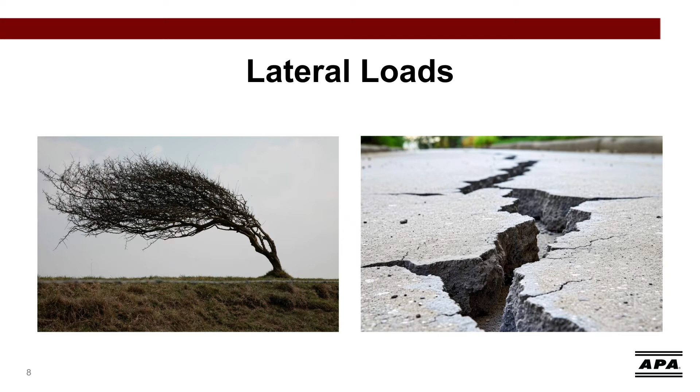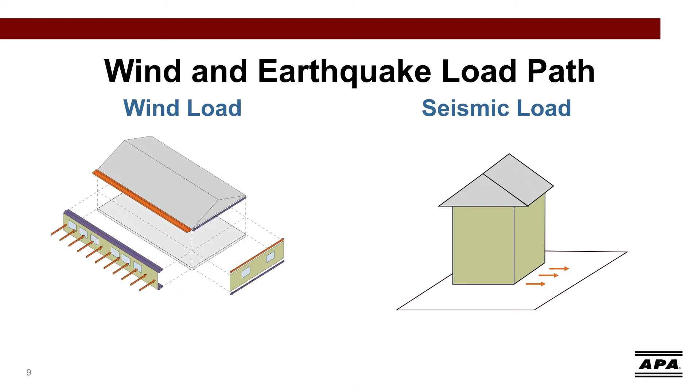To see the lateral load path through the house, we've broken it down into 5 steps. On the left, you can see wind loading, and on the right, you can see earthquake loading. Let's walk through the steps in the load path. They're similar in both cases, which is why the forces get grouped together.

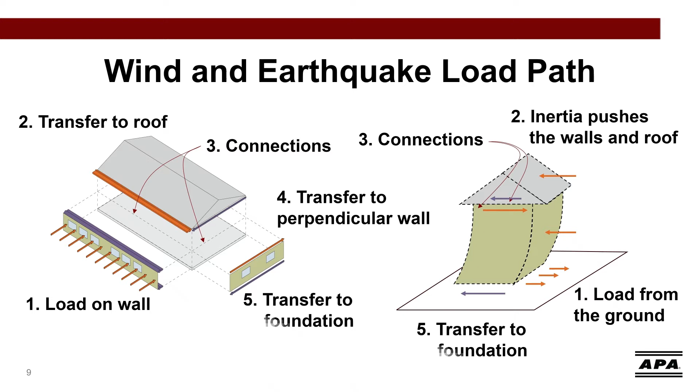The load will affect one wall and then be transferred through the connections into the roof or a floor, and then it will be transferred to the perpendicular wall, again through the connections, and finally the perpendicular wall will take the load down to the foundation.

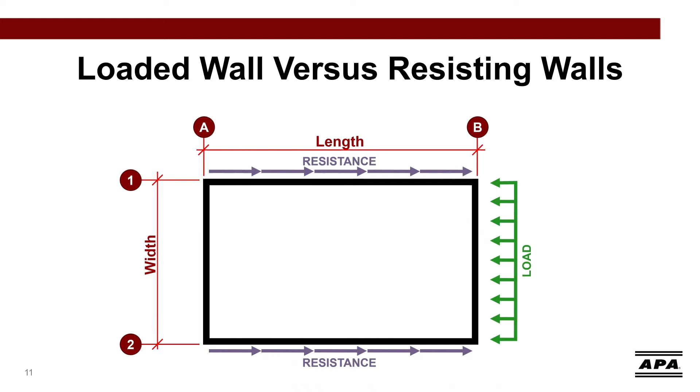If the length and width are to scale, resisting the load in this direction will generally be easier than the last slide because the load wall is shorter, meaning the overall forces are smaller, and the resistance walls are longer, which means there is more space for wall bracing while maintaining the same amount of openings.

The APA and IRC Simplified wall bracing methods are great ways to ensure a complete lateral load path with minimal confusion.

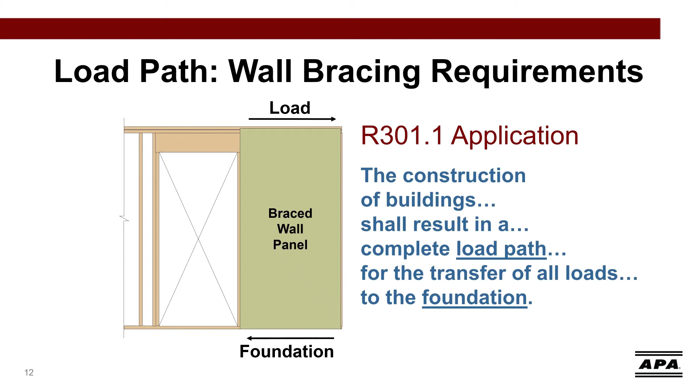Within braced wall panels, there are a lot of different options in the code. We will turn to the APA laboratory to compare the strength of 4 of these methods. These concepts will be key to later parts in this presentation.

So here are the results from full wall bracing tests published in APA Full-Scale 3D Wall Bracing Tests, Form T2007-73. If you would like to go read the full report, it's available for download on our website. The base case tested was intermittent wood structural panels.

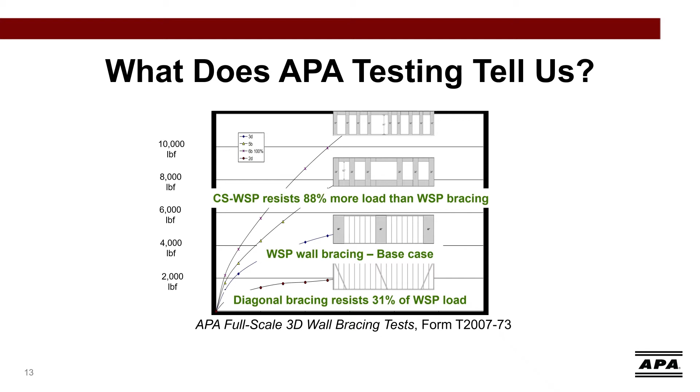The lowest strength found was from diagonal wall bracing, which produced only 31% of the load resistance of the intermittent wood structural panels. Our third tested assembly was continuously sheathed wood structural panels, which provided 88% more load resistance than the base case. Finally, our fourth case is a continuously sheathed portal frame assembly, which resists 174% more load than intermittent wood structural panels.

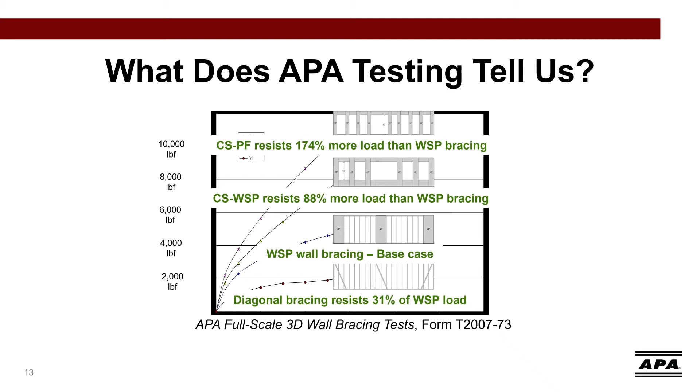These results showed APA the benefits of continuously sheathed wood structural panels and portal frame assemblies. We need to talk about what can go wrong. Why do we care about wall bracing and completing the load path? I'm going to show some quick examples of 3 lateral load failures: racking, base shear, and overturning.

If we go back to our wind and seismic load analogies from a few slides ago, you can imagine leaving a hardware store and experiencing a big gust of wind, or being on public transportation with starting and stopping motion, but now your feet are stuck in concrete, so you tilt backwards.

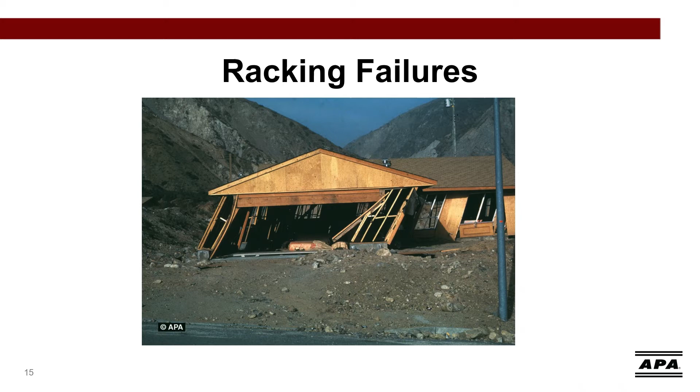This is what happens when we don't have enough anchors to resist lateral force and properly connect the wall to the foundation. Today we will talk primarily about wall bracing designs, but the anchors to the foundation are equally important to complete the load path.

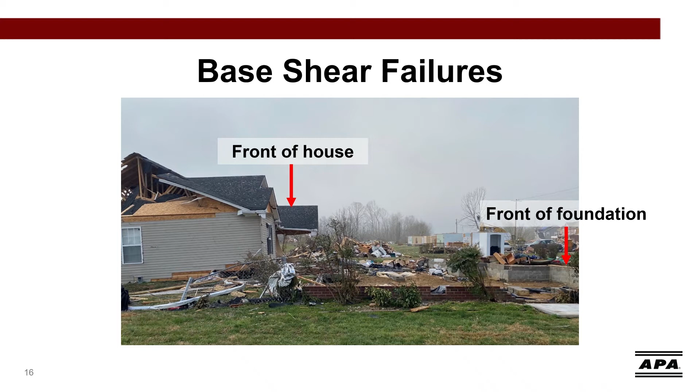To go back to our real-life analogies, this would be you trying to resist the wind or seismic load, but now you're on roller skates. So when that wind pushes against you or the train stops, you don't have any way to stop yourself from rolling away from your initial location.

Essentially, what would happen is the house stays together because of the wall bracing, but doesn't have enough weight or hold downs to stop it from tipping over.

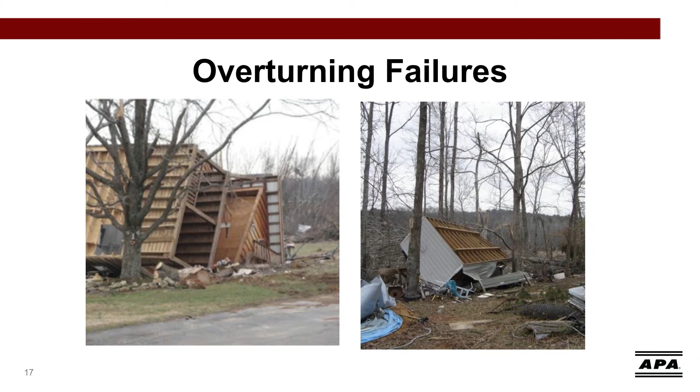Going back to our analogies one more time, this scenario has you holding that sheet of wood structural panel in the wind, but you are absolutely rigid. You cannot bend in any way. So if the wind is strong enough, you will tip over.

Now that we understand the importance of lateral load systems, let's begin with the origins of the two simplified wall bracing methods we are discussing today. In the case of the IRC Simplified method, it's pretty straightforward. There's a section in the International Residential Code, which I will refer to as the IRC, that describes this method. It is section 602.12, the final section of the wall bracing area of the code.

To find the system report that describes the APA Simplified method, follow these simple steps. First, go to the APA website, apawood.org, and click on Publications under the Resource Library tab. Then type in SR102 or Simplified Wall Bracing in the search bar and hit Enter. This is the screen that will pop up.

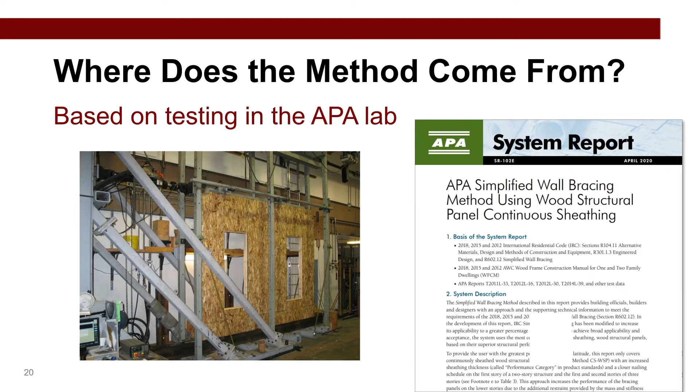Now that we are familiar with the basis of both the IRC and the APA Simplified methods and can find them, we're going to describe their requirements. Because they are simplified methods, they have specific requirements in order to use each method. We'll start with the requirements for both the IRC Simplified and the APA Simplified method.

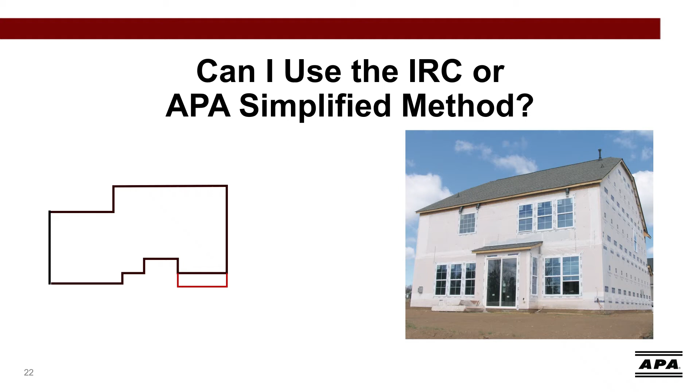Both methods require the structure to be less than 3 stories. They need an eave to ridge height that's less than 15 feet, and the floors can only cantilever 24 inches or less. The final requirement relates to wall height. For the IRC Simplified method, the maximum wall height is 10 feet. There is one minor change for the APA Simplified method requirements: the wall height can be up to 12 feet, so that's a bit of a difference between the two methods.

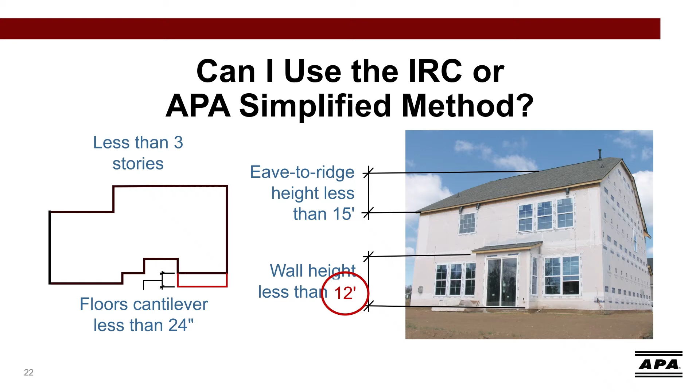We have a few more requirements to use either the APA or the IRC Simplified method. The structure has to fall within seismic design category A, B, or C for a single-family home, or category A or B for a townhouse. The structure must also have an ultimate wind design speed of less than or equal to 130 miles per hour and be in wind exposure category B or C.

In this case, I chose an example of somewhere in Iowa. We would look at these two maps found in the IRC, and we would see that this structure falls under IRC Seismic Design Category A and an ultimate wind design speed of 105 miles per hour, close to the 110 mile per hour border. But either way, it falls within the requirements.

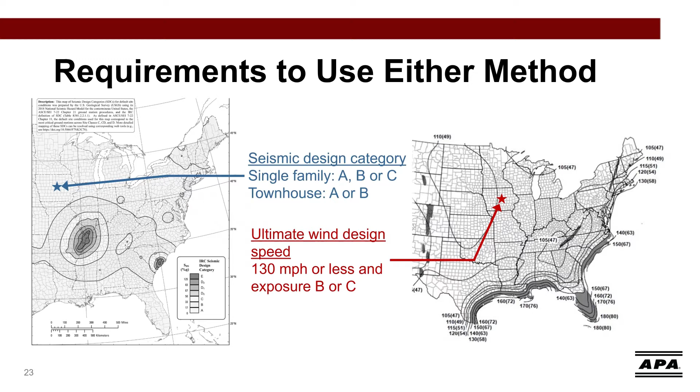Our final requirement for using either the APA Simplified or the IRC Simplified method is that there can be no cripple walls in a 3-story building. You'll see later in this presentation that there is an adjustment factor for cripple walls in a 1- or 2-story building, but no cripple walls are allowed in 3-story buildings.

Additionally, permanent wood foundations are not allowed in either the IRC or APA Simplified method.

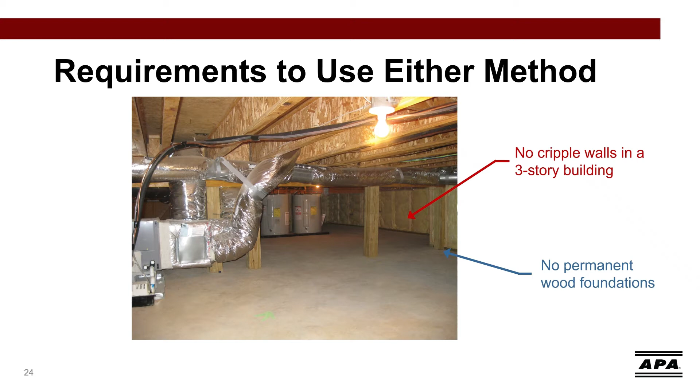We will now differentiate the IRC Simplified method. It has some additional specific requirements to show you. The first is that the exterior walls must have 1/2 inch of gypsum board on the interior face. There is an exception to this requirement for portal frames, which we will discuss later in this presentation.

The second requirement is that all horizontal panel joints in the wood structural panels should be blocked. Those are the two requirements specific to the IRC Simplified method.

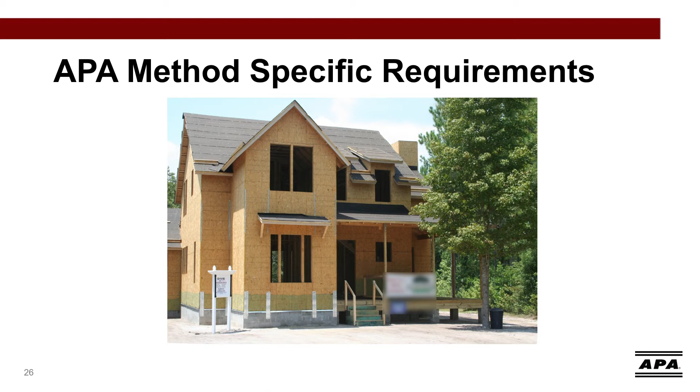Now there are two APA Simplified method specific requirements we're going to talk about. The first is that the sheathing on the lower stories, meaning the first story of a two-story home and the first and second story of a three-story home, have above the code minimum panel edge nailing. The panel edge nailing is 8D common nails at 4 inches on center. For reference, the code minimum edge nailing is 6D or 8D common nails at 6 inches on center. The intermediate fastening does not change from the code minimum nailing of 12 inches on center. In the APA Simplified method, the upper story also has the code minimum nailing requirement.

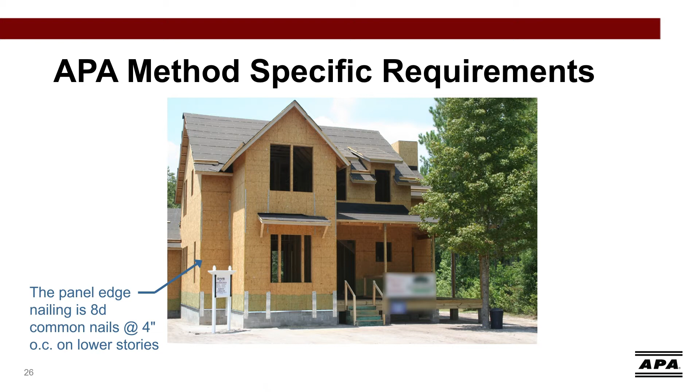The second requirement is that the home must be continuously sheathed with 7/16 inch performance category wood structural panels. There is no option for intermittent wall bracing in this method. The structure must be continuously sheathed so that it can take advantage of the extra strength provided by having continuously sheathed wall assemblies.

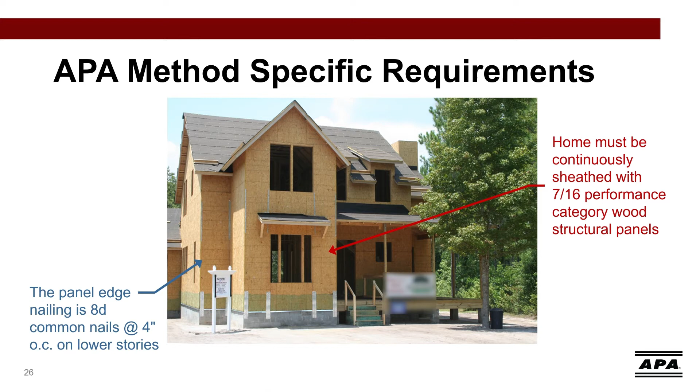Now that we know the requirements and have checked our house to make sure we can use this method, we will transition into the steps of this method. There are 3 steps, so it should be easy to remember and execute. Step 1: circumscribe a rectangle around the structure. Now that we see what that rectangle would look like, we verify it fits within the requirements. Both the long and short side must be less than 60 feet, and the maximum ratio of the long side to the short side is 3:1.

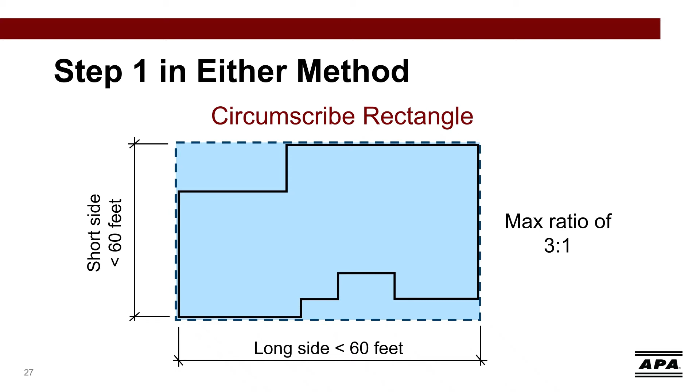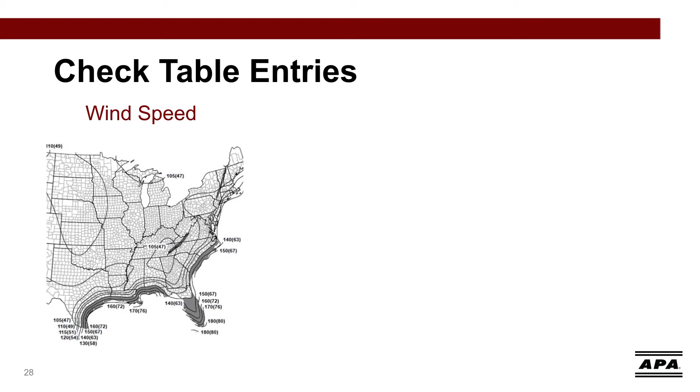Once we have that rectangle, we're going to go into the appropriate table. The table has the following 3 inputs. First, you would enter the row of the appropriate design wind speed, then select the row for the appropriate story, and finally enter the row for the roof eave to ridge height.

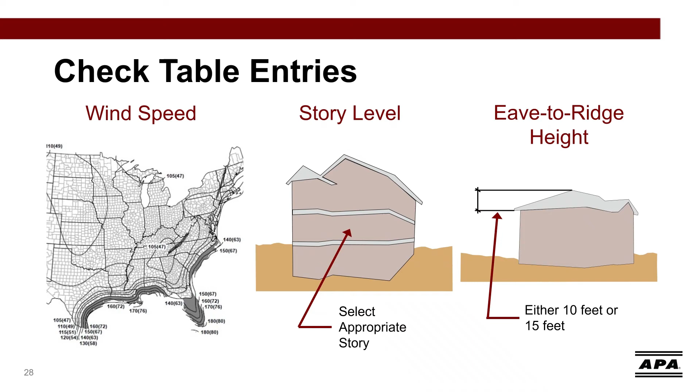The two options available for roof eave to ridge height are 10 feet or 15 feet. For reference, in a 60-foot wide home, an eave to ridge height of 15 feet is a roof slope of 6 to 12. Here are the wall bracing tables and a sample plan.

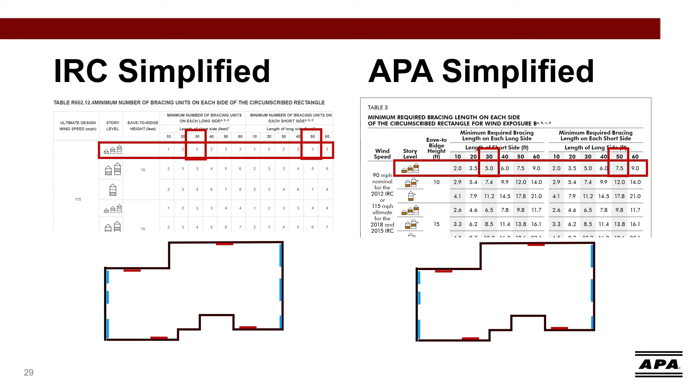There is one footnote for the IRC Simplified bracing table that is really important to consider: there is no linear interpolation in this table. If your building length is 32 feet, the appropriate column is 40 feet. There's no interpolation. As discussed on the last slide, linear interpolation is allowed in Table 3 for the APA Simplified method. So if the building length is 32 feet, you could use a value between the 30-foot and the 40-foot columns in Table 3. We will demonstrate this later in the example.

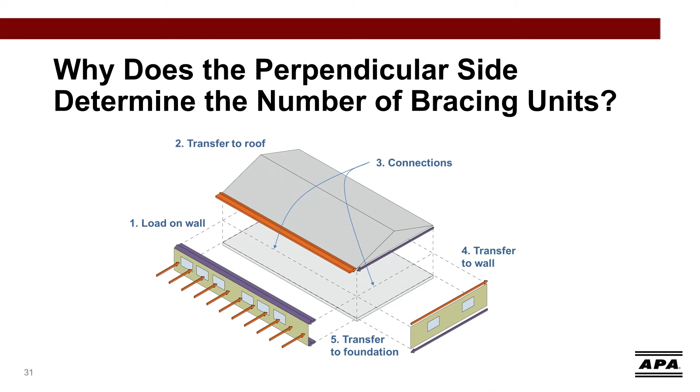I would like to take a second to pause here and talk about why the length of the long side is going to affect the bracing on the short side, and the length of the short side is going to affect the bracing on the long side. If we circle back to one of the slides we talked about earlier, it comes down to load path. The wind load on the long wall is going to get transferred up into the roof or the floor. The fancy engineering term for that is diaphragm. It is then going to go over to the perpendicular walls. The wind that is hitting the long wall is being transferred to the foundation and supported by the wall bracing on the short wall. That is why the tables are set up this way. I wanted to circle back on that point now that we've looked at the tables a little more closely.

Now that we have completed step 1, to circumscribe the rectangle and find out the base length of the bracing required, we will be adjusting it. The APA and IRC simplified methods have some adjustment factors that are shared and some that are different. We are going to start with the ones that apply to both methods.

Both of them have an exposure category adjustment factor. If you'll remember from our map, the structures can only be in wind exposure B or C. If it is exposure B, the adjustment factor is 1. If it's exposure C, I listed the adjustment factors on the slide. They vary for a 1, 2, and 3-story home.

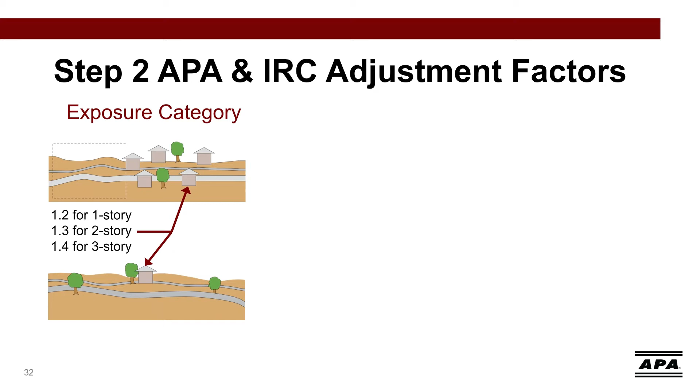This is one of the things we touched on earlier. I mentioned that you cannot have cripple walls in a 3-story structure. This adjustment factor helps explain why. If we're going to treat those cripple walls as a floor, and you have 3 floors above it, then you are essentially adding a 4th floor, which breaks our first requirement. That's a little background of how those things work together and the reasoning behind that limitation.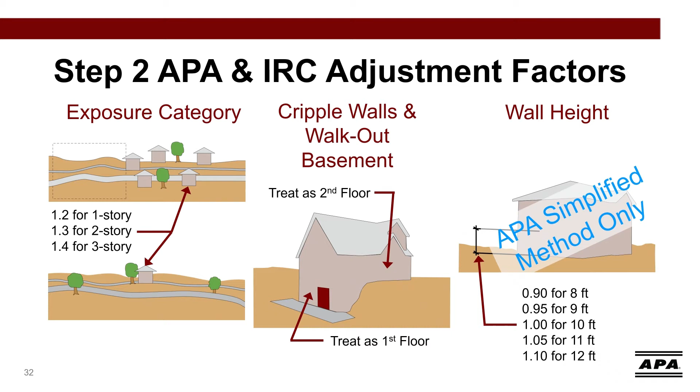The third adjustment factor applies only to the APA Simplified method. It is a wall height adjustment factor. If you'll remember, the IRC Simplified method only allows wall heights up to 10 feet. You'll notice that in the APA Simplified method, the adjustment factor for 10 feet is 1. In the APA Simplified method, walls can go up to 12 feet, but you will have to increase your wall bracing by 10%. Again, this adjustment factor is only available in the APA Simplified method.

Next, we will transition to exceptions in the APA Simplified method. These are listed under the requirements, but have exceptions if you would like to remove them from the design.

The first exception is included if horizontal panel joint blocking of the wood structural panels is omitted. If the horizontal braced wall panel joints are not blocked, the base value from Table 3 is adjusted by a factor of 2, which is a significant adjustment factor.

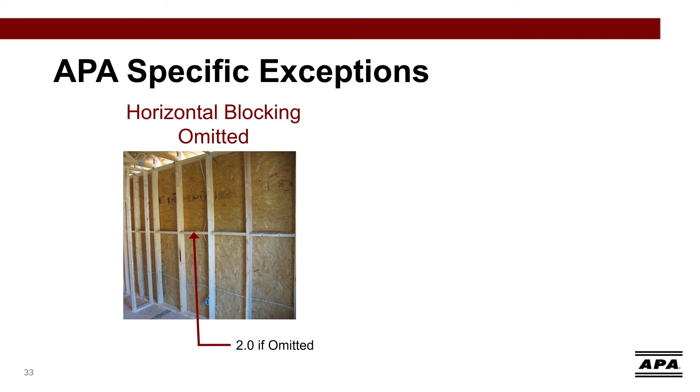The second exception is included if interior gypsum is omitted. If interior gypsum is omitted, the base value from Table 3 is increased by 40%. This can be isolated to only a single wall. For example, if the garage will not have interior gypsum, this adjustment factor could be applied to that wall, but not to the other 3 sides of the rectangle.

Additionally, there is an exception for narrow bracing methods, which we will describe later in this presentation. The interior gypsum board is not required in those cases for both the APA Simplified and the IRC Simplified methods.

You'll notice that these 2 exceptions are requirements in the IRC Simplified method. The IRC Simplified method requires blocking of horizontal panel joints and the inclusion of interior gypsum. The APA Simplified method provides those requirements as a default, but does have these exceptions. It adds a little bit of complication, but allows more freedom of choices.

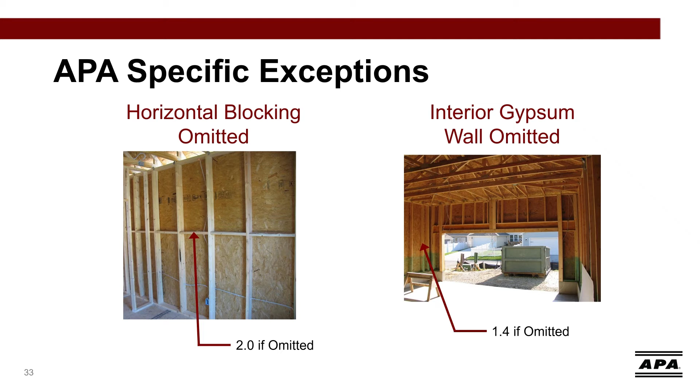On to the final step. We have our base value, that was step 1, and then we have our adjustment factors, that was step 2. And now we are ready to lay out the panels. There are a couple things we are going to consider: a minimum braced wall panel width, a maximum spacing in between the braced wall panels, and then a maximum braced wall panel distance from the corner.

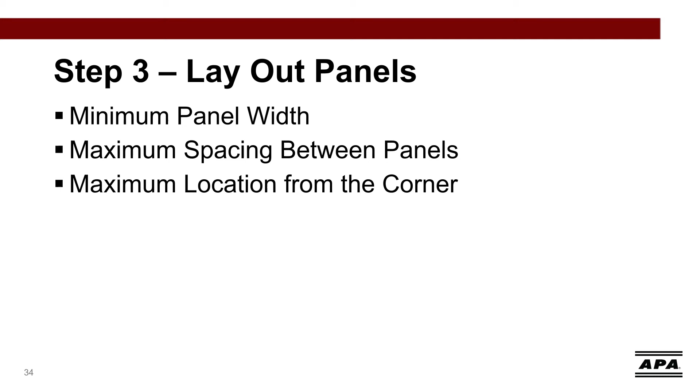The minimum panel width comes from a height to width ratio, and the maximum spacing and distance from the corner is required so the house is uniformly braced. There's technical engineering reasons behind these requirements as well, but we won't go into depth about those during this webinar. The overall goal is that the sum of the number of bracing units or length of panel, depending on which method you're using, is larger than the adjusted IRC or APA Simplified requirements.

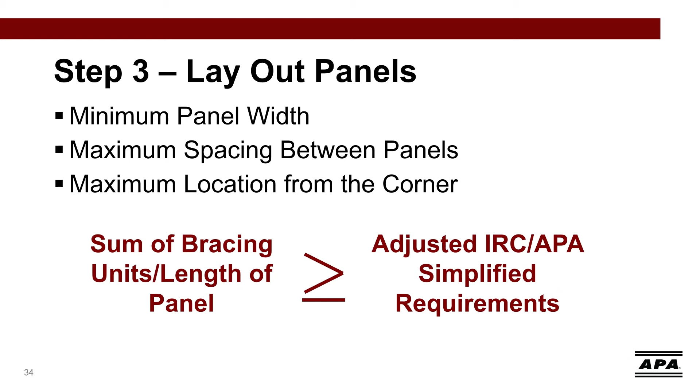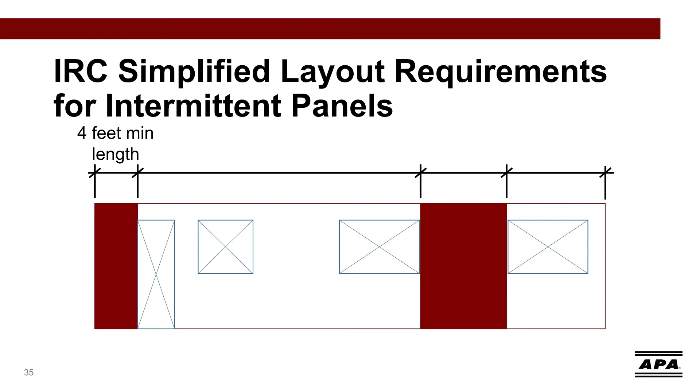Let's review the layout requirements for the IRC Simplified method for intermittent panels first. There is a minimum length of wood structural panel, which is 4 feet. Then there is a spacing requirement of 20 feet maximum in between the panels.

If you have a length of panel that is greater than 4 feet, you can take the actual length and then divide that by 4 feet. That will give you the number of equivalent bracing units. It is okay if you have a decimal number of bracing units. For example, if we had a 6-foot section, we would consider that 1.5 bracing units. And that's okay, because with the adjustment factors, the original base value might have a decimal as well. So don't worry about that. Bracing units do not have to be done in whole numbers.

The final layout requirement is that the edge of the last braced wall panel must be within 12 feet of the corner. It can be at the corner, but as shown on this slide, if there is a window, then the first braced wall panel must start within 12 feet of the corner.

The second option of layout requirements is still for the IRC Simplified method, but we have continuous sheathing. Even the parts of the wall that are not a braced wall panel are still going to be sheathed with wood structural panels. They are shown as lightly shaded on the slide. This is going to look relatively similar to the last one we walked through. The minimum length is 3 feet instead of 4 feet, so it's a little bit smaller. That is due to the increased strength of having a continuously sheathed wood structural panel wall.

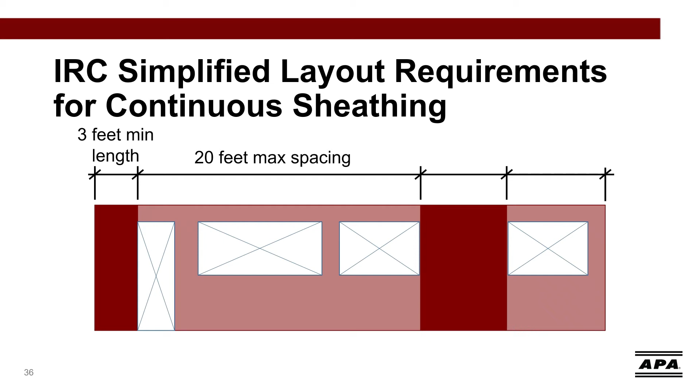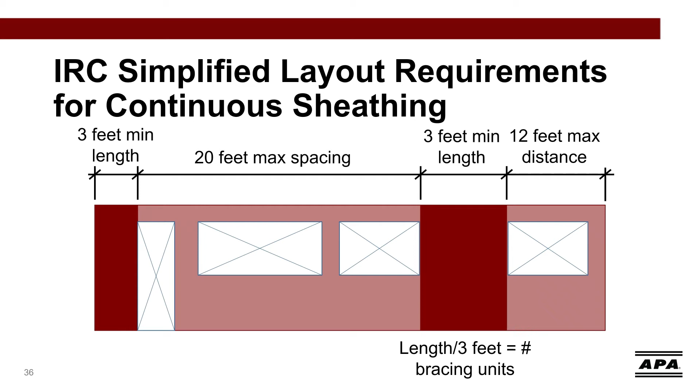If you remember from our earlier slide, it's an 88% increase in strength. The spacing in between panels is still a maximum of 20 feet. If you have a longer section, you can take that length and divide by 3 feet. So the 6-foot section we used as an example in our last slide would now count as 2 braced wall units. Finally, we have a 12-foot maximum distance to the corner, same as the previous slide.

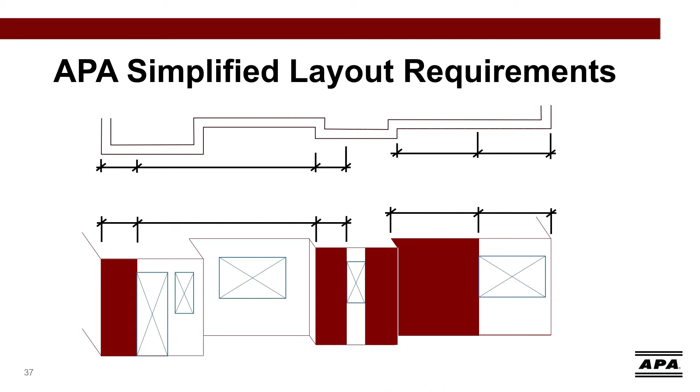The third requirement pertains to wall offsets and bump-ins. There can be a 4-foot maximum distance from the bump-ins to the edge of the circumscribed rectangle. Those are the requirements for the APA Simplified method.

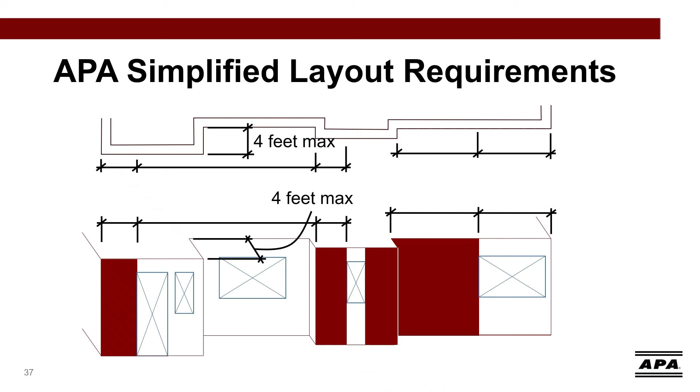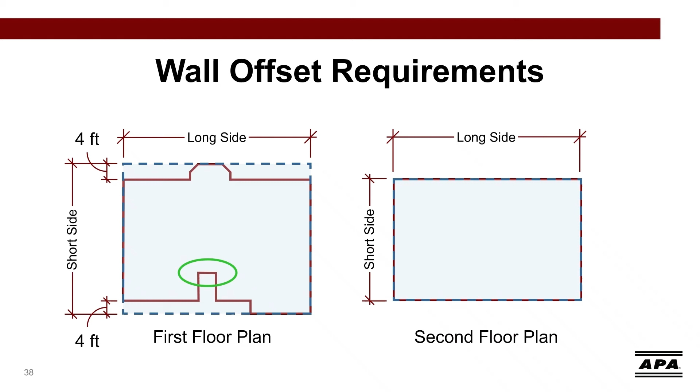You may notice that compared to the IRC Simplified method, 3 feet is the minimum for the continuously sheathed wood structural panel method, so those match. The APA Simplified method will let you utilize smaller lengths of panel depending on the wall and opening height, so it's a little bit of an advantage.

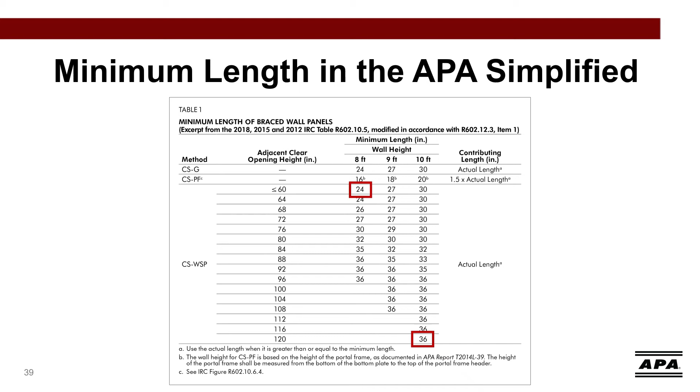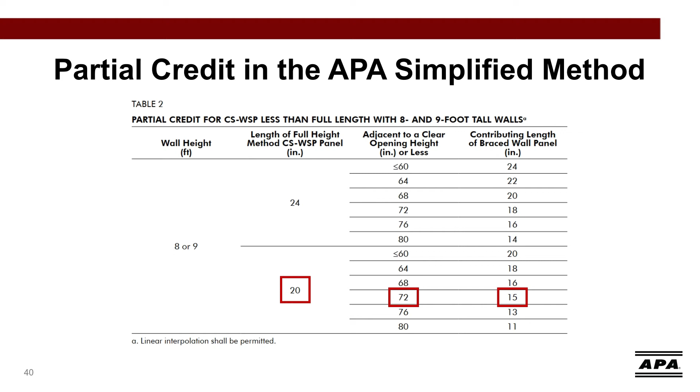Another unique element to the APA Simplified method is partial credit. This only applies to 8-foot and 9-foot wall heights, but within those wall heights, narrower sections of wood structural panel are permitted. Table 2 shows the values of partial credit allowed in the APA Simplified method. It is not a 1-to-1 ratio. For example, a 20-inch panel next to a 72-inch tall opening provides 15 inches of wall bracing. This is an advantage of the method because it allows narrower sections of the wall to contribute to the total bracing, but not the full amount. It's a partial credit.

Another way to utilize narrow sheathing panels is to use a portal frame. Portal frames are a topic we can talk about for much longer than we have today, so we're going to conduct a brief overview of the 3 different types of portal frames and one of the publications available to you from APA about portal frame construction. If you'd like more information about portal frames, you can find it through our webinar, Code Compliant Portal Frames Built Right.

The first type of portal frame is portal frame with hold downs. Portal frames with hold downs can be used for intermittent or continuously sheathed braced wall lines and can be used on a single-story structure or on the bottom of a 2-story structure. They cannot be used in 3-story houses. A unique element is that portal frames with hold downs require 2 3,500-pound hold downs, hence the name.

The second type of portal frame is portal frames at garages. PFGs can be used in low seismic areas only and are only allowed next to garage door openings. It can be used on a single-story structure or on the bottom of a 2-story structure.

The final portal frame is a continuously sheathed portal frame. This is the only portal frame method that can also be used on an upper floor of the structure. It also has the smallest width requirement. This method allows panels as narrow as 16 inches for an 8-foot header height. Taller header heights require wider walls.

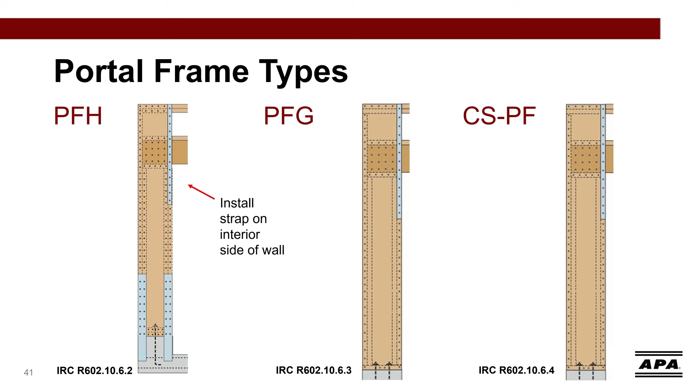A common error we see occur is the strap location. The correct strap location is on the interior side of the wall next to the opening, as shown in all of these figures. Portal frames are tested assemblies, so it is critical to build them as specified in code.

If you need quick tips to avoid common errors like the one we just saw, APA has published a 2-sided builder tip written in Spanish and English. The document provides framing tips when fabricating portal frames. The builder tip, as well as several other portal frame related publications, can be downloaded for free from apawood.org.

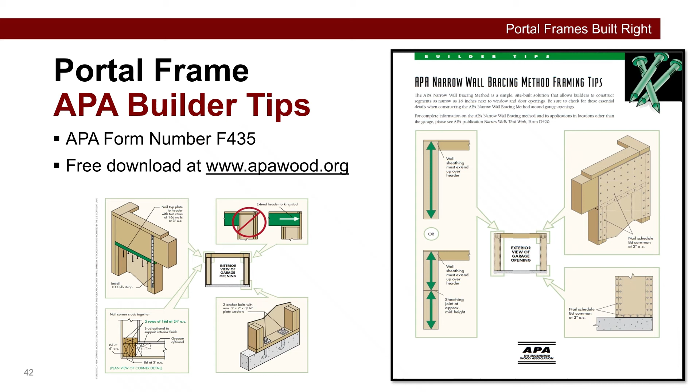There are portal frame options in both the IRC Simplified and APA Simplified methods. In both methods, the portal frame segments do not require or have an adjustment factor for omitting interior gypsum sheathing. They were tested without interior gypsum, so they get to be an exception to the requirements of a typical braced wall panel. In our discussion, we're going to start with how to apply portal frames in the IRC Simplified method.

There are 3 portal frame options: continuously sheathed portal frame that is equivalent to 3/4 of a bracing unit. We have a portal frame with hold downs that counts as 1 bracing unit, and a garage portal frame that counts as 3/4 of a bracing unit. Again, don't let the decimals scare you. It does not have to come out as a whole number.

There are a few caveats to portal frames. For continuously sheathed portal frame, you are only allowed to have 4 of them in one braced wall line of the house. You can have more than 4 total over the whole house, they just can't all be on one wall. This limitation is removed in the 2021 and 2024 IRC, so depending on which code has been adopted, this limitation may be removed. For portal frames with hold downs and garages, I wanted to note that these are intermittent methods from the IRC code, but they can be used with continuously sheathed wood structural panels as well.

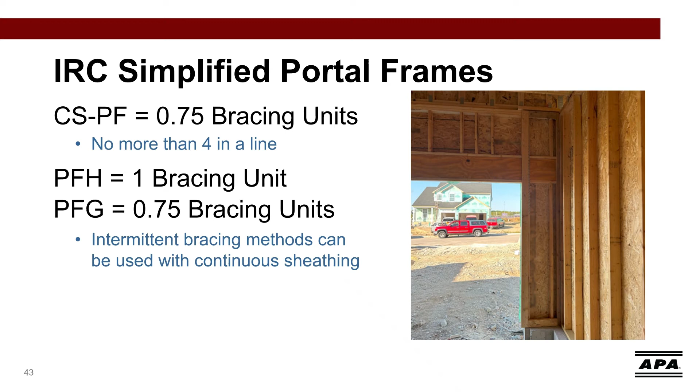Hopping back to the APA Simplified method, let's look at portal frames. There's only one portal frame option in the APA Simplified method. And because the APA method looks at wall lengths instead of bracing units, the continuously sheathed portal frame will be equivalent to 1.5 times the actual length of the panel. If we had a 2-foot continuously sheathed portal frame, it would count as 3 feet when we add up the lengths of all the braced wall panels.

The other narrow bracing method is not a portal frame. It is the continuously sheathed wood structural panels adjacent to the garage method. It contributes its actual length with no multiplication factor.

The same advisements come with continuously sheathed portal frames. There can only be 4 continuously sheathed portal frames in one line. For the CSG narrow bracing method, the wood structural panel does not have the details required in a portal frame.

However, there are very limited locations where CSG can be used. It can only be used when the garage is supporting a gable end or roof load. It cannot be used with a second floor above the garage. Additionally, it can only be used on one wall of the garage. It should be used next to the garage door opening. The picture on the right is an example of where CSG braced wall panels could be used.

There are some other requirements for CSG. Refer to Table 602.10.4 of the IRC and its footnotes for more information on this bracing method.

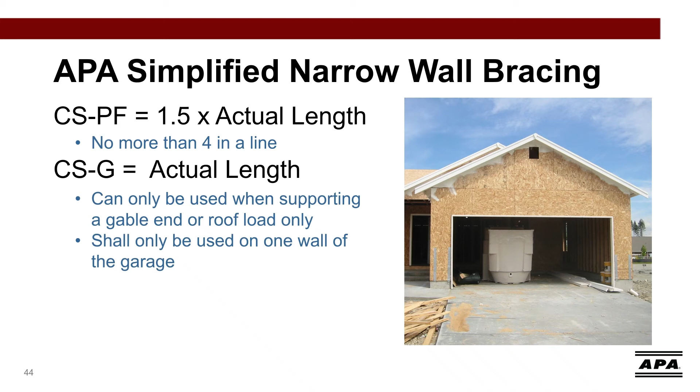Before we wrap up with a summary and an example, we have one last topic. A unique element of the APA Simplified bracing method is that you can have multiple rectangles.

In the example shown on this slide, we are looking at an L-shaped building. In the normal APA Simplified method, you would not be able to circumscribe a rectangle around this lopsided building. It breaks the requirement of the longest dimension being no larger than 60 feet. However, the APA Simplified method allows you to break this up into 2 rectangles.

We would need to break up that 76-foot dimension, so I would suggest breaking up the L shape as shown here. Each rectangle must meet the initial requirements we described. We would go back to the beginning with each piece.

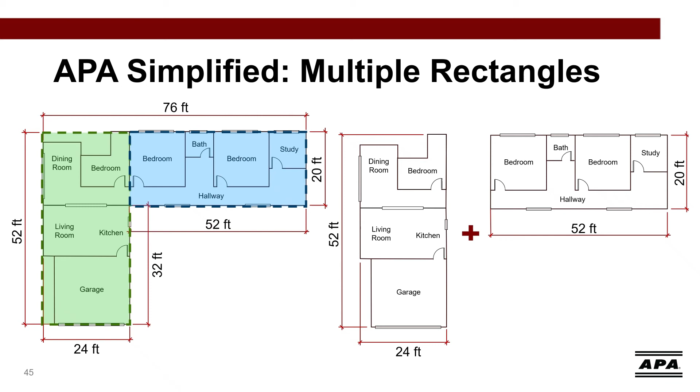Now all the lengths are below 60 feet, but we would also compare the length to width ratio. 52 feet to 20 feet is 2.6 to 1. That is close to our 3 to 1 limit, but still falls below the threshold. Because the 52 feet and 20 feet ratio works, we know the 52 feet to 24 foot ratio works because it must be lower.

We would just keep going through the 3 steps as we described with each rectangle. If you're going to use the multiple rectangle method, the procedure for all the separate walls is identical in a standalone building. In contrast, the common wall needs to have sufficient bracing for both rectangle A and rectangle B.

Looking at this slide, you can see part of the wall for rectangle A is extended past rectangle B, so all of that bracing would go towards rectangle A. For the shared portion of the wall, we will split the bracing between the 2 rectangles in order to meet the spacing and overall length requirements.

Here, I chose to provide more bracing for rectangle B because rectangle A has a large amount of bracing on the garage wall, so the real goal would be to meet the spacing requirements.

If a common wall has both an interior and exterior portion, a combination of continuously sheathed wood structural panel and gypsum board sheathing can be used. If gypsum board sheathing is used on the interior portion, the total amount of bracing provided should be twice the length listed in Table 3. You can think of it as a 2 times adjustment factor.

If the bracing requirement with the adjustment cannot be met on the common wall, continuously sheathed wood structural panel can be used on the interior walls to remove the doubled bracing requirement. In that case, you would use the original value found in Table 3 of the APA Simplified method with all the other adjustment factors, for example, wind exposure.

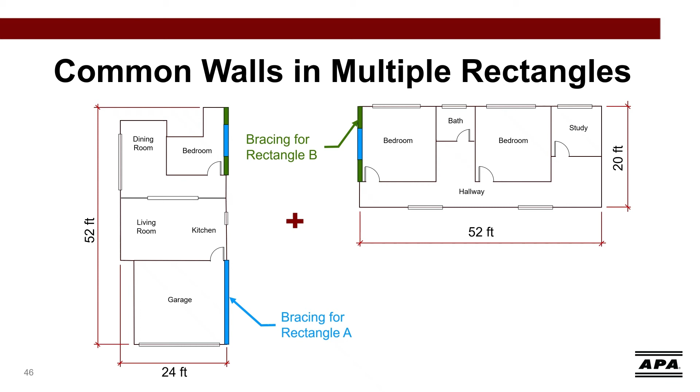We've made it to the end. Now our design is complete, so before we start our examples, let's summarize what the differences are for the APA and IRC Simplified methods so you can look at them side by side.

The first one is that the minimum performance category of the sheathing is different. In the IRC Simplified method, the minimum is 3/8 inch performance category sheathing, and in the APA Simplified method, it's a minimum of 7/16 inch performance category sheathing. Then we can see the difference that the IRC Simplified method allows intermittent sheathing and the APA Simplified method does not.

And then we see that the minimum lengths of the braced wall panels in the 2 methods are different, and there is a wall offset maximum in the APA method that does not exist in the IRC Simplified method.

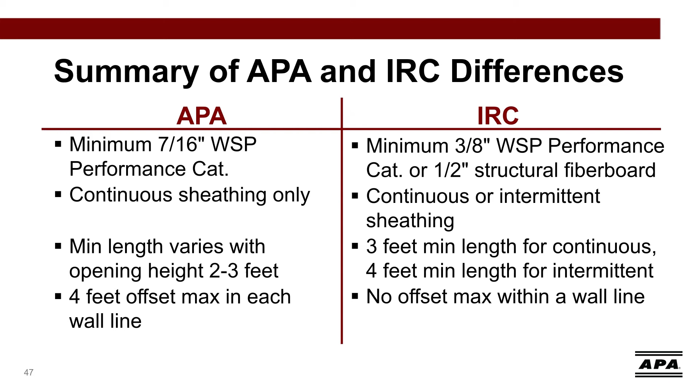You thought we were done, but there are a couple more summaries. The maximum wall heights allowed in the two different methods are different. The APA Simplified method has additional exceptions for omitting wall blocking and omitting gypsum. In the IRC Simplified method, it is just a requirement. You cannot omit them. To complete our summary, there is a difference in the nail pattern requirements.

The APA Simplified method has a nail spacing of 4 inches on center at the perimeter of panels for the first and second story of a 3-story and for the first story of a 2-story home. The IRC Simplified method uses the minimum code nailing everywhere. To clarify, in the IRC code, 6D common nails can be used with 3/8 inch performance category sheathing, and 8D common nails are required with 7/16 inch performance category sheathing.

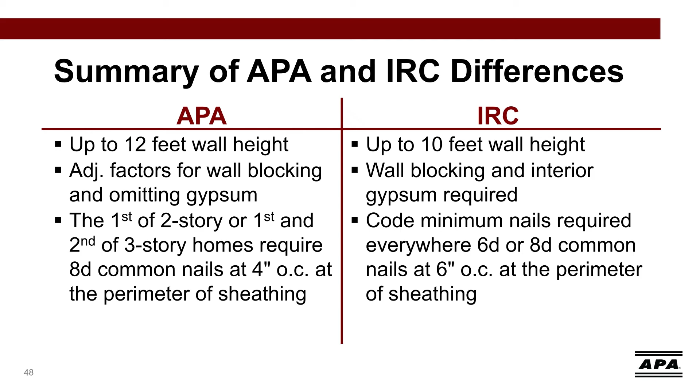Now let's walk through an example. We're going to walk through the same example in both methods, and we're going to see how they differ. We will go through everything we just discussed, step 1, 2, and 3, with real numbers so you can get an idea of how to use each method.

Okay, I chose a 2-story townhouse. It's 22 feet wide, 38 feet long, with a single garage door. This is a sample plan and elevation view.

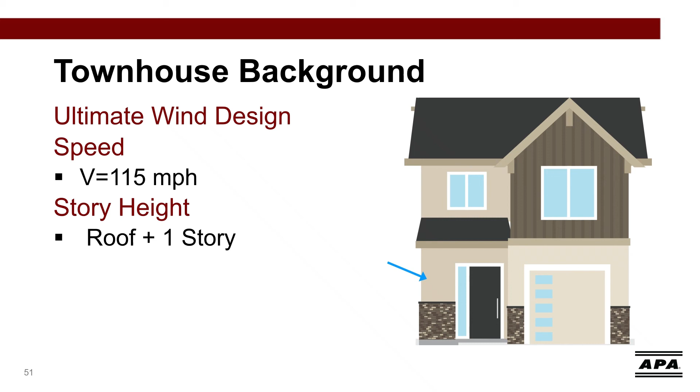Before we enter the IRC or APA Simplified tables, we need some information about this townhouse. First, what is the ultimate design wind speed? In this example, I selected 115 miles per hour. Second, what story are we selecting? We'll select the bottom of this 2-story townhouse. Finally, we need the roof eave to ridge height. It is 9 feet, which we'll round up to 10 feet when we enter the tables.

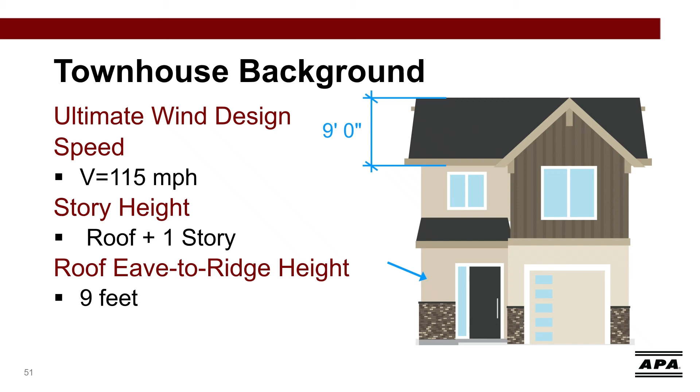For the IRC Simplified method, let's walk through step 1. First, we circumscribe the rectangle around the structure. Then we choose the ultimate wind design speed, the story level, and the roof eave to ridge height. We then look at the length of the short side and the long side, and find the number of bracing units in the table. So here's your answer. Remember, no linear interpolation is allowed.

So even though the building dimension in the previous slide was 22 feet, that's going to round up to 30 feet because we don't get to take a weighted average.

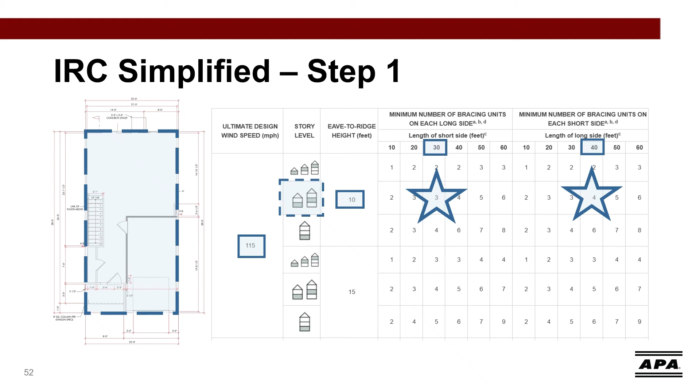Step 2, we look at our adjustment factors. Let's assume we're in exposure category B, which is an adjustment factor of 1. And that's it. The other adjustment factor would have to do with cripple walls or a walkout basement, but those don't apply to this townhouse. So we're done, it's that simple.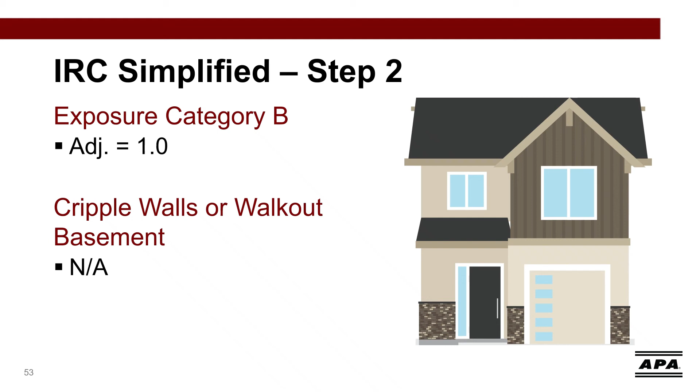Zooming through to step 3, for the example we'll look at the first floor front wall, because this is probably going to be our hardest one to design. With the short overall length and the number of openings, it's probably going to be our biggest challenge. I believe in getting the worst one over with first, so we'll start with the wall most likely to fail.

Based on step 1 and 2, we would need 4 bracing units, right? Because we're taking the length of the long side to find our bracing on the short side. It's the perpendicular wall length that matters. Since our long side is 38 feet, we round that up to 40 feet, and if we go back to the table from the previous slide, the output was 4. That was our step 1 answer. Then we multiply by the adjustment factor, which in this case is 1, and we end up with 4 bracing units.

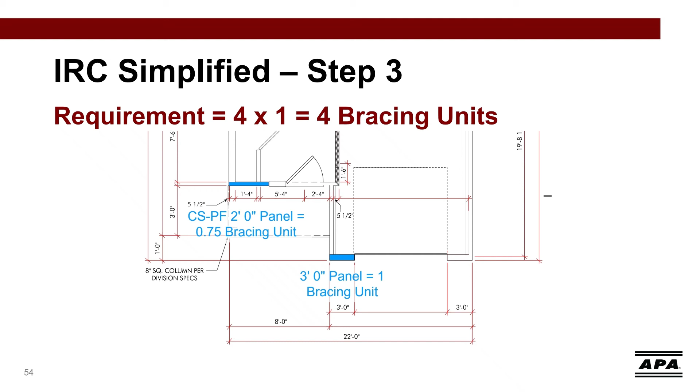The first thing we would do is make this section a portal frame because it's not long enough to be a full bracing unit. This counts as 3/4 of a bracing unit. Then we have 3-foot panels next to the garage, which count as 1 bracing unit each if we're using continuous sheathed wood structural panels. If we add all that up, it totals 2.75 units, and we need 4 bracing units. That's definitely not meeting our requirements, so this would not comply. We're going to have to go back to the drawing board for how we meet our wall bracing requirements.

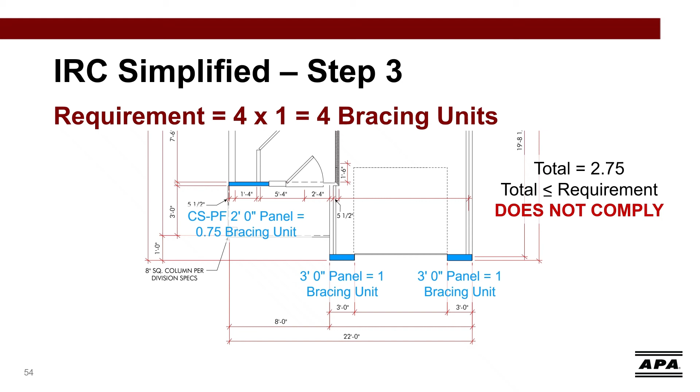We're going to hop over to the APA Simplified method and start back at step 1. We circumscribe the rectangle, then choose our wind speed, our story level, and our eave to ridge height, then put in the length of the short side and the long side, and come out with our final answer. We're looking at the same front wall, so what we care about is the minimum required bracing for the short side, which is dependent on the length of the long side. I know I keep repeating that, but it is relevant and important that you pay attention to which side the wind is hitting and which side the wall bracing needs to be on. Our requirement is going to be 9.9 feet for that front wall.

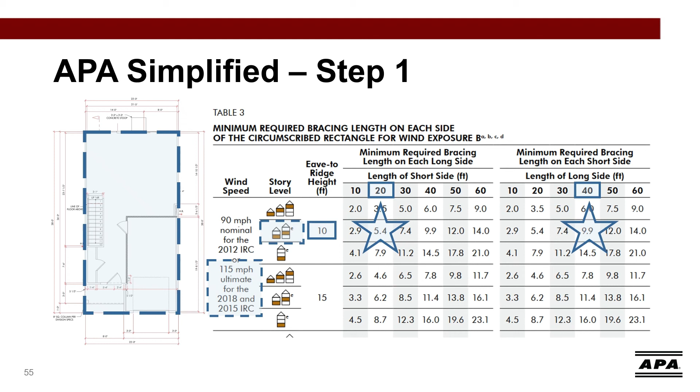I'm tossing in step 1.5. I know that's unfair, I told you it was only 3 steps, and now I'm adding a half step, which feels like cheating, but the APA Simplified method allows linear interpolation. So we have 38 feet, not the full 40 feet, and we can reduce that 9.9 feet to 9.4 feet. This simple linear interpolation is just drawing a line between the 2 points on the table and finding the point in between. If you need help with this step, Google and AI can probably do this for you relatively easily.

Okay, back on track for step 2. We look at the adjustment factors. There are more adjustment factors in the APA Simplified method, so it might seem a little more complicated, but it's to give the designer a little more freedom about the choices you can make. The first factor is common with the IRC Simplified method, wind exposure category. We're still going to choose B.

Then we have a wall height of 9 feet. I know the slide says 9 foot 1 1/8 because that's what's often called out on drawings, but nominally it's a 9-foot stud. That adjustment factor is going to be 0.95. Then we assume that interior gypsum is present and that the horizontal joints are blocked, so both of those adjustment factors are 1. We're going to keep those in the example because they are requirements in the IRC Simplified method, so we want an apples to apples comparison between these two.

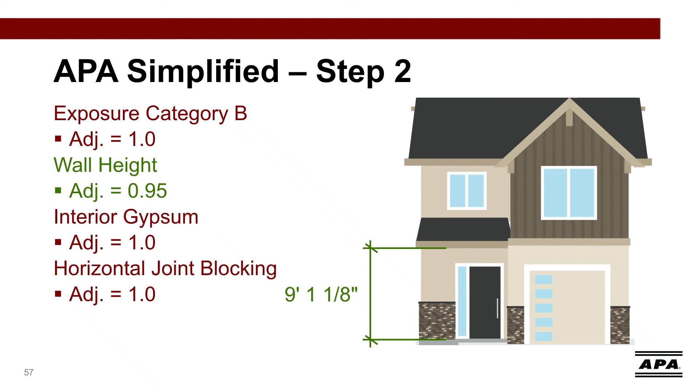You see here at the top, we've multiplied our 9.4 from step 1.5 by 1 and 0.95 and by 1. That's going to give us 9 feet. It actually gives us 8.93, but for simplicity, it's 9.

We can start our layout again, going left to right. We are still going to need that section next to the door to be a portal frame, so that counts as 1.5 times the length. So there's a 2-foot portal frame that counts as 3 feet of wall bracing.

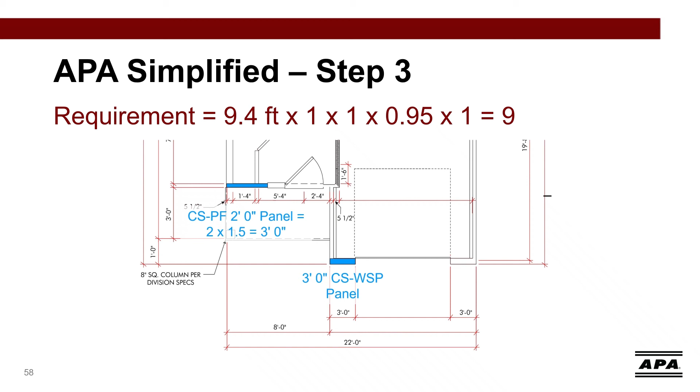Similar to the IRC example, we're going to use the 3-foot panel next to the garage and the other 3-foot panel on the other side of the garage. Those both meet the minimum length requirements. We add up 3 plus 3 plus 3, which is 9. So we needed 9 feet, and we have exactly 9 feet. Awfully convenient how that math worked out.

It's almost like I planned it. With this bracing, the wall would be in compliance. And in this situation, we would be able to utilize the APA Simplified method to make a configuration work that does not work for the IRC Simplified method.

I do want to point out that we need the offset requirements from the front wall be less than 4 feet. If it was more than 4 feet, you wouldn't even be able to use this method, so it would not comply. The APA Simplified method is not going to work in every situation, nor is the IRC Simplified method. They have advantages and disadvantages, but they are useful tools to have in your tool belt.

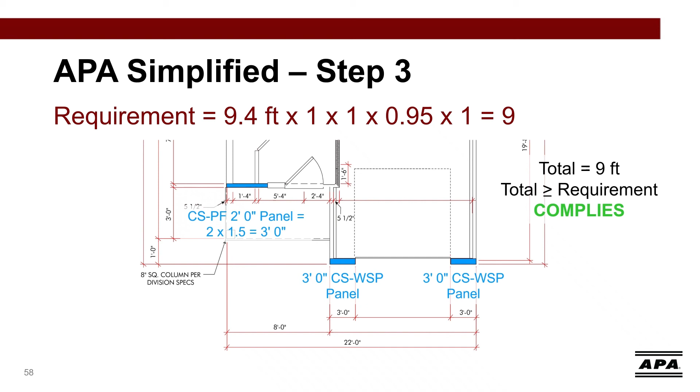Just for giggles, we didn't talk about it today, but I looked at our example from the IRC traditional method. I'm not going to walk through how we got these numbers. We don't have time. I'm just going to tell you the results. If you would like to learn more about traditional IRC wall bracing, APA has several webinars that walk you through the process.

We would have a portal frame next to this door, then the 2 3-foot panels next to the garage. These are the same bracing panels that we had in the simplified methods. The requirement is 10 feet, and we have 9 feet of bracing, so this method does not comply. The thicker performance category of the panels and the different nailing pattern gives the bracing panels a stronger resistance, which is why the APA Simplified method has a requirement of 9 feet, while the IRC traditional method is 10 feet.

I do want to say that you can always modify your design. In this case, if we get rid of the side light next to the door and we have a 4-foot panel on the left side, it no longer needs to be a portal frame because it meets the minimum length. And then the math becomes 4 plus 3 plus 3, which is 10 feet. So that would comply.

Another option would be to utilize the panels next to the garage as continuously sheathed portal frames. Let's walk through that scenario. We would keep the continuously sheathed portal frame next to the door and the side light, and then we would have 2 continuously sheathed portal frames, one on each side of the garage. Those portal frames would count as 4.5 feet of bracing each. This would add up to 12 feet of bracing, so that would also comply.

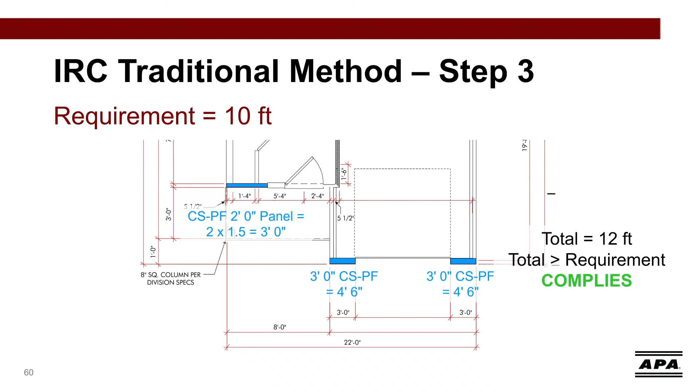What I want you to take away is that there are a variety of options for how to make your wall bracing work. It is up to you as the designer to choose the methods you want to use. If you ever have trouble comparing the methods, you can refer back to this webinar or reach out to APA.

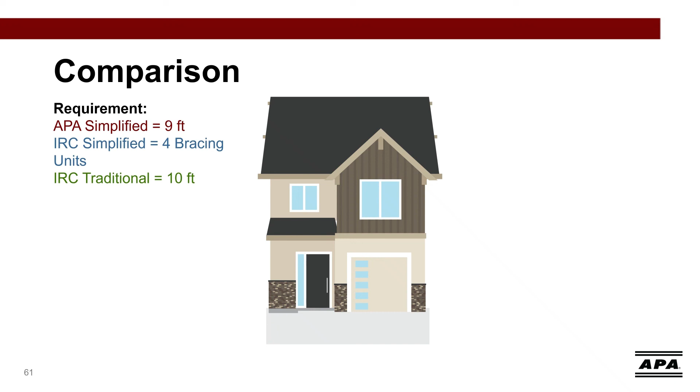This is another summary page. It reviews the bracing on the first floor front wall of a standalone townhouse. The requirements are in the upper left corner. The minimum performance category for each of the methods is shown here.

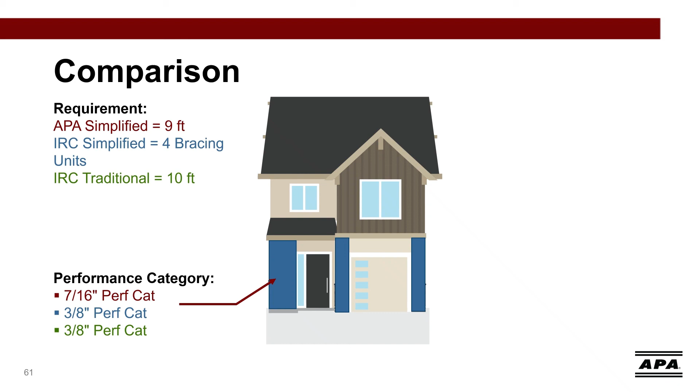The APA Simplified method needs 7/16 inch performance category continuous sheathing around the entire perimeter, and the IRC methods require 3/8 inch minimum performance category sheathing. The perimeter nailing is 6D or 8D common nails for the IRC methods, and it changes based on the performance category of the sheathing selected.

The APA Simplified method will always use 8D common nails, and the APA Simplified method has a nail spacing of 4 inches on center at the lower stories, while the IRC Simplified method has a nail spacing of 6 inches on center. In all the methods, the nailing at the intermediate supports is spaced at 12 inches on center.

As mentioned above, the nail size can vary in the IRC methods based on the performance category of the sheathing. Our conclusions were that the wall bracing in the APA Simplified method complies, the bracing will not work for the IRC Simplified method, and the IRC traditional method could comply if we removed the side light next to the door or used more portal frames next to the garage.

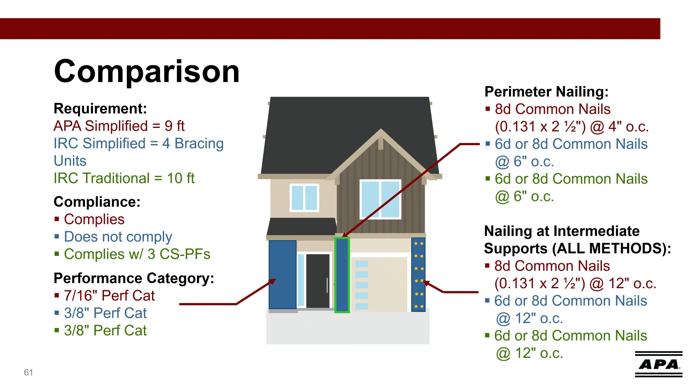That is all we have for today. So with that, I can turn it back over to Pat and we can answer some questions. Jacqueline, time for a few questions.

Here's the first: Have there been changes to the IRC Simplified method in different code editions? Yes, that's a great question. The International Residential Code updates with every cycle. I would say the biggest change for the simplified method comes between the 2012 and the 2015 IRC, which went from service design wind speed to ultimate design wind speed. That was a code-wide change, but it affects the simplified wall bracing as well. There are other minor changes we talked about in this presentation. In 2021 and 2024 IRC, they removed the limitation that you can only have 4 continuously sheathed portal frames in one wall line. But overall, the main steps we talked through - circumscribing the rectangle, the adjustment factors - are consistent through all of the different code editions. So make sure you check what code is adopted in your local area and use the correct code, but overall, a lot of those steps are going to be the same through the different code editions.

Next question: Can you use the IRC and APA Simplified method on certain walls or stories without using it on the whole structure? No, the APA and the IRC Simplified method are all or nothing. So you use the entire structure, all the stories, all the walls, or you don't use it at all. There's no way to break it up and have just one wall be an engineered design. If you're going to go that route, you have to use either the IRC traditional method or engineered design.